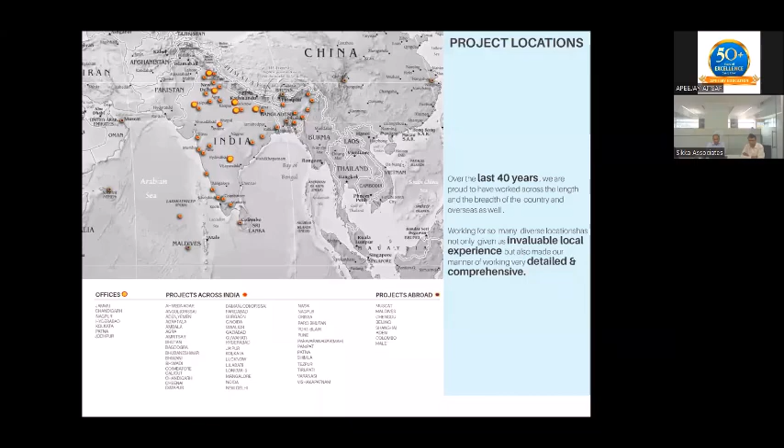Two things about our design. We always try to design in a very practical manner, so that our designs are used for decades and decades by people very easily, very practically. They are easy to maintain buildings which people come into every day and are able to use in a very efficient, very pleasant environment. Buildings are not just meant to be finished and inaugurated, but over years and years of people's lives working in them, they must satisfy functional requirements, maintenance requirements, how the buildings sustain over time, and how the functions they are meant for may change while still allowing those changes.

Those are important aspects. At the same time, something innovative, something fresh, something unique about every project is also possible. So it's always a blend of a very practical, pragmatic, down-to-earth approach, but something innovative also, and at the same time relevant to the time and place that we make it. So these are the four most important aspects.

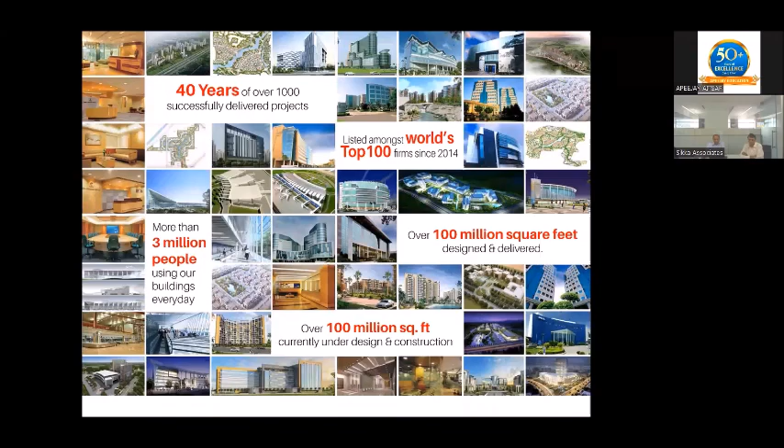We have been listed amongst the world's top 100 in the last 7 to 8 years, a rating by a British journal. We've also been fortunate to win a few awards over the years. So just a glimpse of the breadth of the projects, the range of all kinds of works across the architectural and construction industry. A lot of institutional work, a lot of offices, transportation work - possibly these three are amongst the biggest sectors we have been working on.

Now I'll go on to IIM Jammu first, and discuss this project more in detail, so we can see how one project has evolved in terms of various thoughts and stages of the thought process. Then I'll show a few more interesting slides on other projects we are currently working on or recently completed.

So the IIM Jammu site, I believe you would have largely seen or understood. It's a site out of Jammu, between Katra and Jammu, along the NH44, which forms the frontage of the site. The site goes deep away from the highway between two catchment nalas, which are drainage catchment nalas, and basically the ridge of the hills is what has been given to IIM.

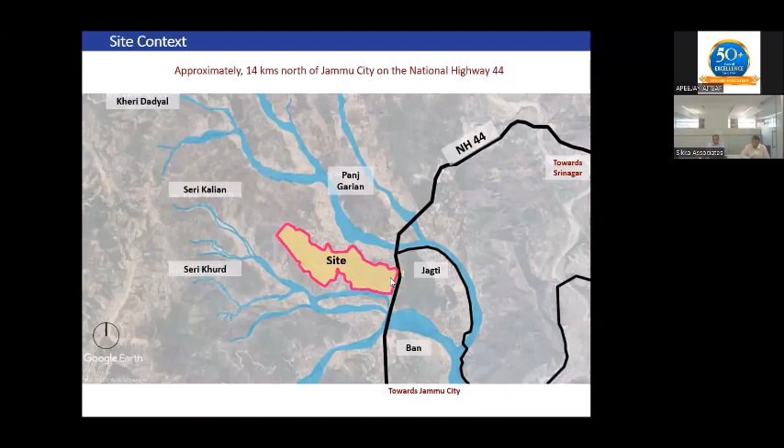The site is about 200 acres, roughly almost 2 kilometers in length, a very linear site.

Now, while earlier IIMs were all largely urban campuses—Ahmedabad, Bangalore, Calcutta, Lucknow—they're all very urban campuses. The kind of picture that emerged from these campuses has regular topography; in terms of land profile, they're pretty straightforward. Therefore, the buildings have taken the attention, evolving various forms and permutations of spaces for the functional requirements of students and the campus. So these are all campuses that are very urban, with straightforward topography.

In our case, when we began the project, there was a design competition. I'll show you the thoughts at the design competition stage first—what was our first reaction to the site and the brief. We wanted to come up with a site that's not just an IIM like many others in urban situations, but an IIM that is very unique to the topography and the site at this location. That was the initial thought direction, and I'll explain how and why it changes and evolves.

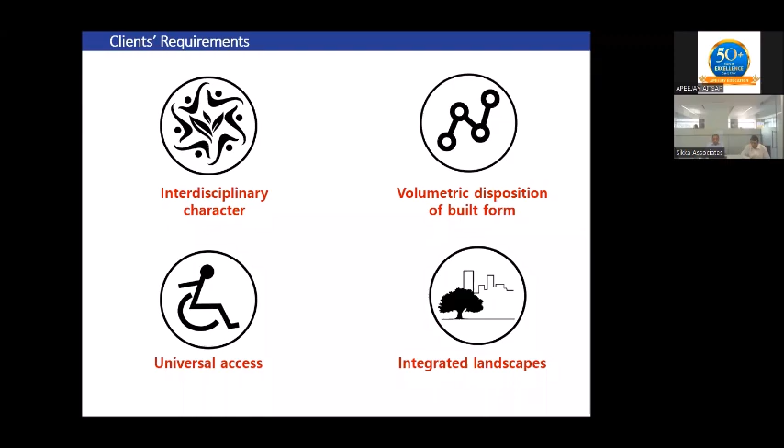Now, campuses, while we may look at them from an architecture point of view, we also have to be aware that campuses are used very rigorously by students, right from morning till evening, sometimes even 24 hours. So they have to be very practical, student-centric learning spaces which are easy to use, easy to live in, and easy to connect between various parts. While they have to be interesting designs, they also have to be safe, convenient, sheltering, and practical.

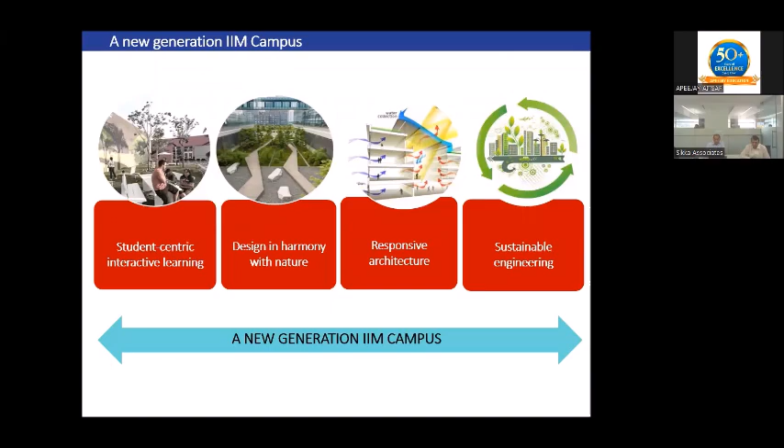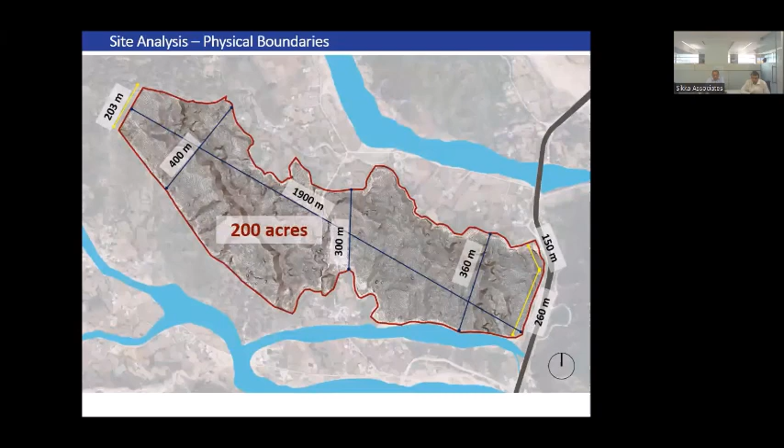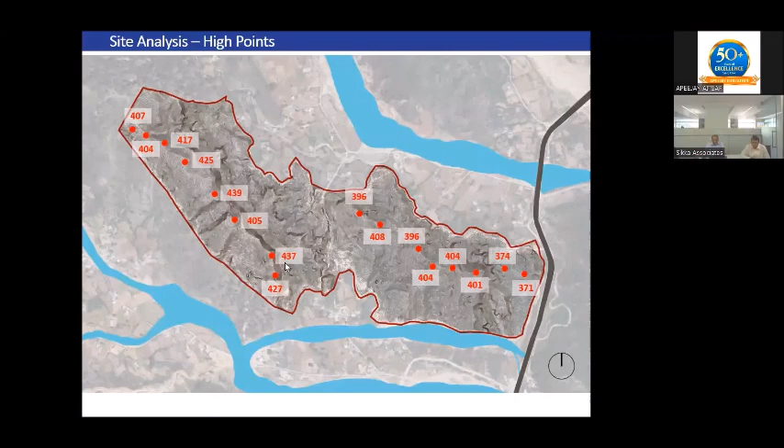Now, these were a few ridges—what you see here are the spot levels of the ridges. Essentially the site is divided into two ridges: one goes right from the highway deeper inside till about the middle of the site, then there's a low-lying valley cutting right through, and then the second ridge goes diagonally across the balance half of the site. This was the site condition, and we had to work to complete phase 1, leaving provision for future phases, at least one more, if not more.

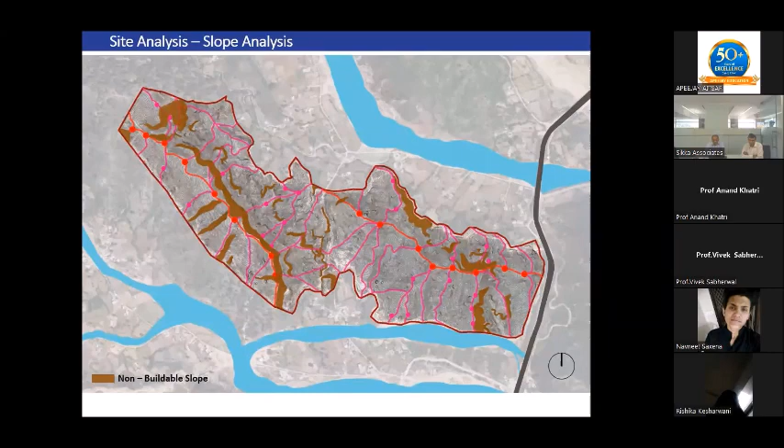This shows the ridge points, the slopes downwards, and also some of the catchment areas—the natural edges of the site. It's not that water is already retained there, because without a boundary the water just flows downwards to the rainwater channels. But these are the fringes of the site where natural drainage is possible to be created, and if we were to create a larger retaining structure, these could become catchment areas, allowing larger natural water bodies.

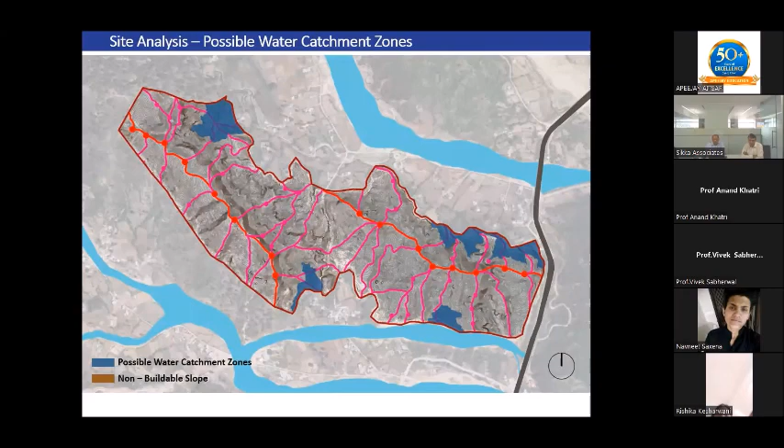Now, if you see, hill 1 has a sharper slope to the north and a shallower slope to the south, and hill 2 is the reverse: a shallower slope to north and sharper slope to south.

So phase 1, logically, since the entrance is from the highway, was meant to come up on hill 1. And it's logical that we largely use the south facing slopes, so there's more sunlight and more area available for the development of the campus.

So 3-4 important things: preserve maximum trees on site, preserve the gradient as much as possible, and maintain a gradual slope of about 1:20, which is walkable, so that in daily commutes between buildings it's not difficult for students to do that several times a day, like from hostel to dining and back to hostel, or to academic blocks, or to sports, with several commutes during a typical day routine.

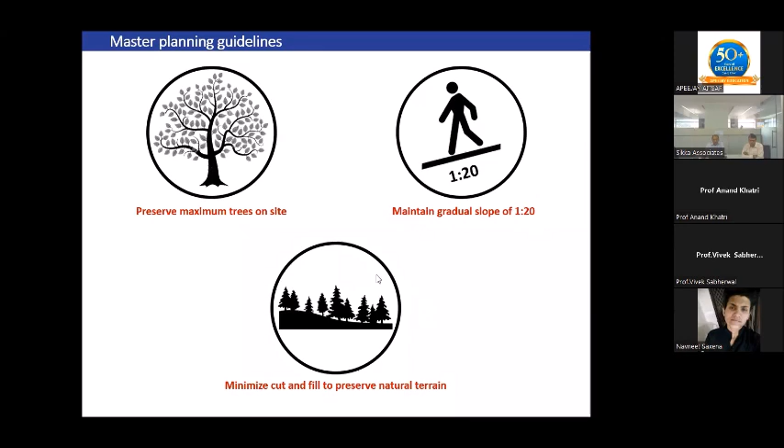And third was, of course, to create minimum cut and fill and use the contour if possible.

Now, option 1 is if we create buildings only on the ridge. While it may be easy to construct, the negative is that the road network would be quite long, and the buildings will change the topography of the site, becoming visible as protruding from the top of the hill.

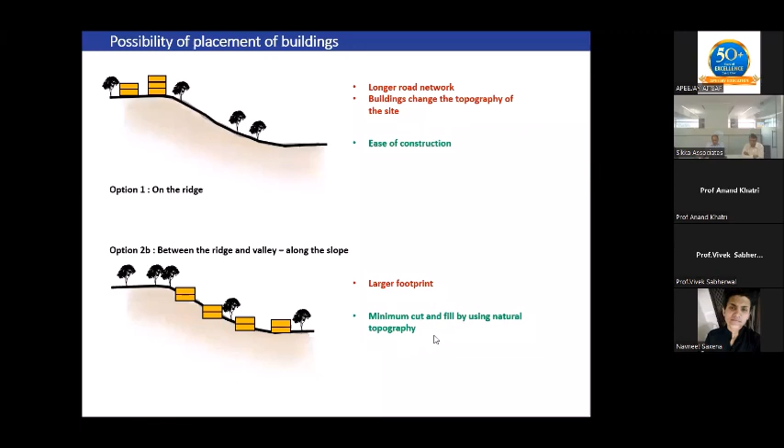If we build on the slope only, leaving the top free, we get a larger footprint spread across, but the benefit is that we possibly have lesser cut and fill.

So the ideal situation is that you build neither on the top of the ridge nor in the valley, and use the mid slopes. That is by and large the right strategy, to use the slope in a way that we still allow drainage to the lower levels, do not clog the lower levels, and use the buildings to maneuver between the cut and fill required on the slopes.

Find the lesser slopes, build the buildings there, and maintain the essence of the site, which is sloping. The ridge, being very precious with very little footprint, can also be used for landscape, or for only a few selective buildings if required. So that is the ideal situation.

So with that thought, in the design concept stage we placed the buildings like this. We had the main academic campus facing south, smaller blocks to the left going on to the student hostels, and then the sports areas at the valley area.

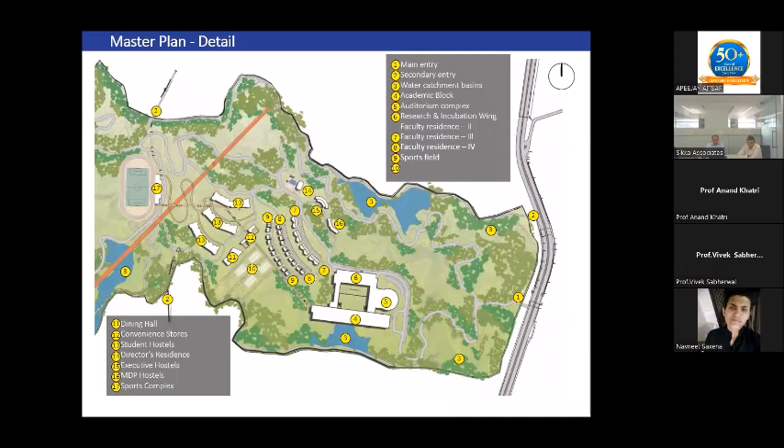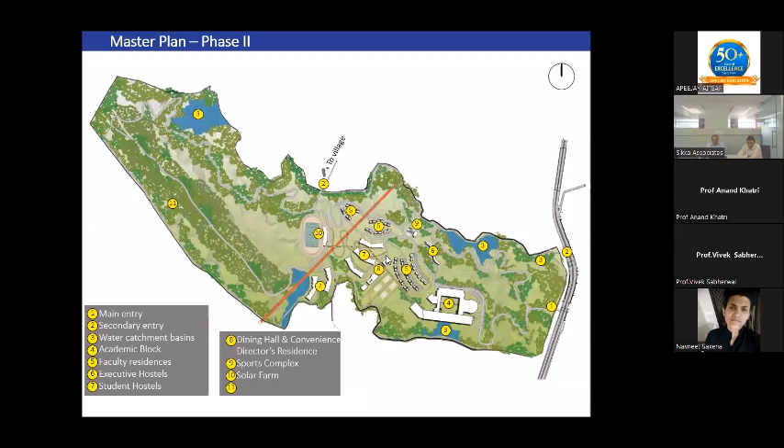So that's the kind of layout we proposed at that time, using the north slope only for very selective purposes, maybe some senior faculty and the director's residence and so on. Everything else was facing south.

So the important thing was that we left the entire edge of the site able to retain water at the lower levels, and built at the mid slopes. We took service connections across the mid slope as well.

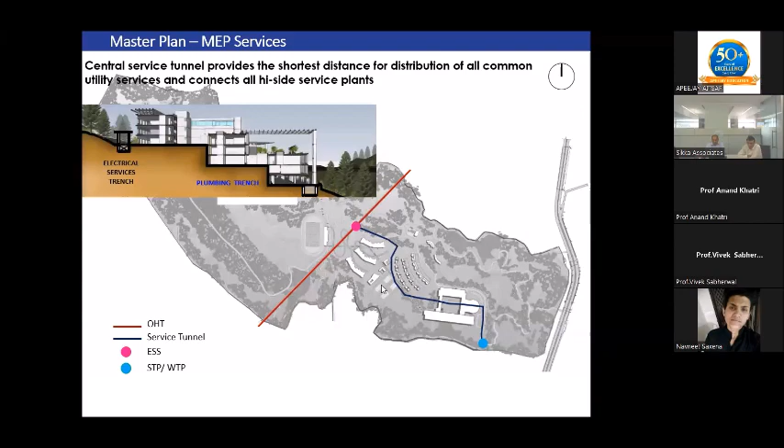The academic block was placed in a manner that, having created a natural catchment area by putting a retaining wall on the extreme southern edge, we allowed the water to come in and create a natural water body at certain times of the year.

Even if the water is not there in peak summers, which it won't be, still the element of the slope, the element of the landscape, the element of green space itself is also a wonderful thing.

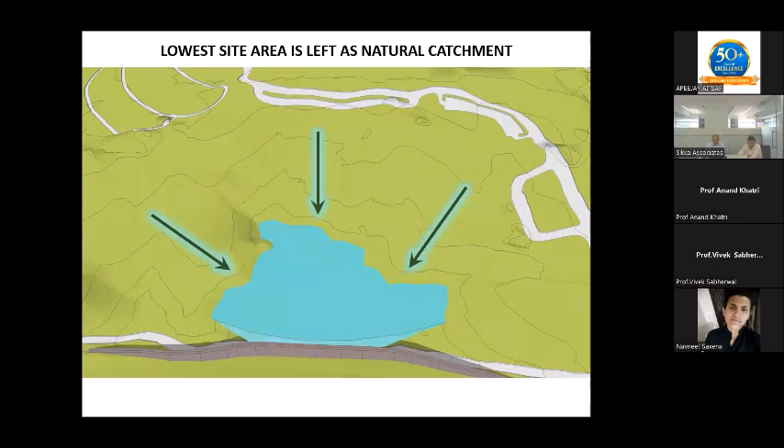And water would have filled up at certain times depending on the rain and the amount of harvesting or catchment we can do. So the extent of water was not regulated, only the southern edge of the water was regulated.

So it was more like a step well kind of situation, where we thought we would contour the land into a series of steps and allow the water to be retained at as many levels as possible.

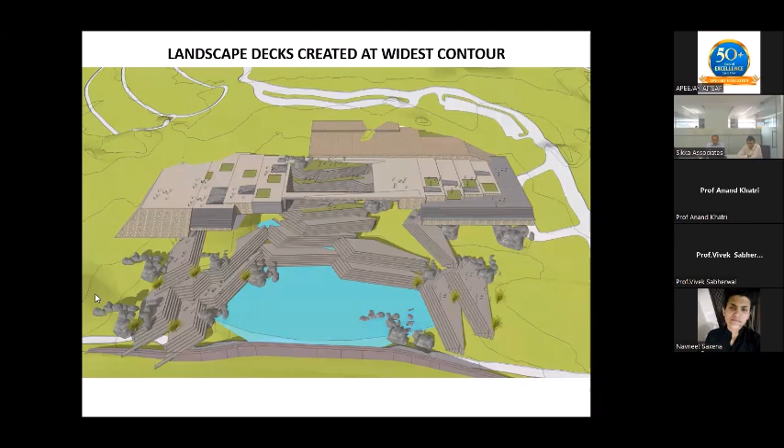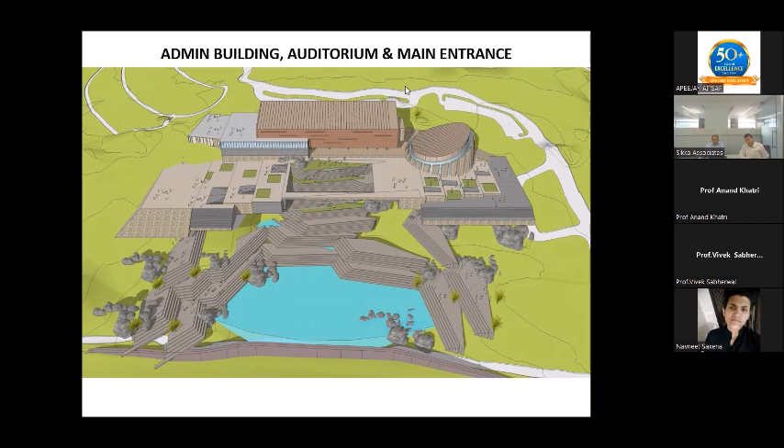At the mid level, we created a few landscape decks overlooking this entire open space with the larger steps and the water body. On that deck, we had the larger buildings approachable from the upper side, from the top of the ridge where the main approach road was placed. The road approached the auditorium building, admin building, and the main entrance to the plaza.

Then on the two sides we placed the connecting link blocks, and the student zones with the library and cafe were at the lowest level. On top of it we placed the main academic block, overlooking the entire valley and the landscape.

So that is the kind of structure that we had designed and planned, that we would have minimal construction on the northern edge, and we would largely have a linear building placed above the slope so that we have minimum cut and fill. We allow the water to flow right through the building below it, and the building is kind of an independent, floating, independently placed building with a largely contemporary form, but maybe with a few slopes depending on the profile for the terrace that we choose and the solar panel angles and so on.

And a building which enjoys the view, the openness, the large greenery that is all around us, and the south facing facade, so that we have plenty of natural light going right deep into the building.

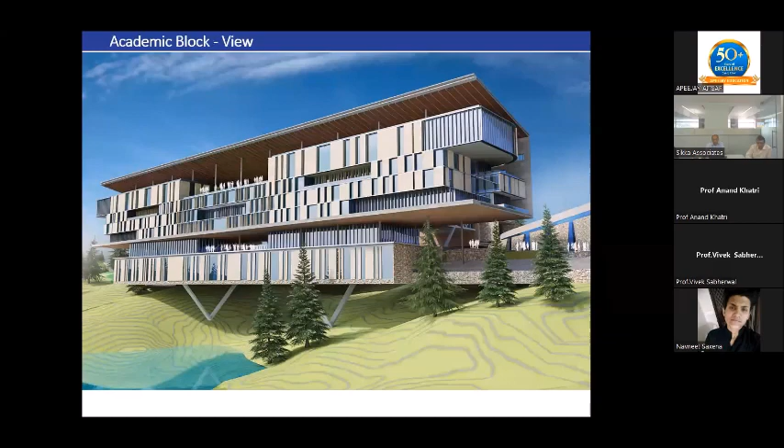From the water body level, that's the view that we would have got. So the lowest block that you see, that is the cafeteria, student center. Then we have the deck level, which has a few other amenities. And then we have 4 or 5 levels of academic buildings.

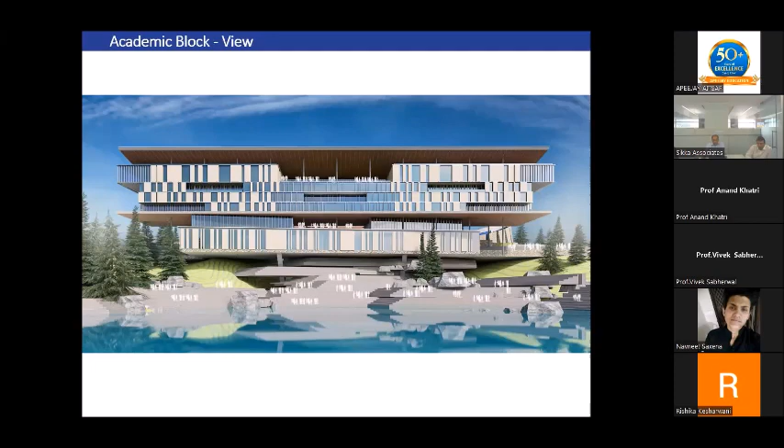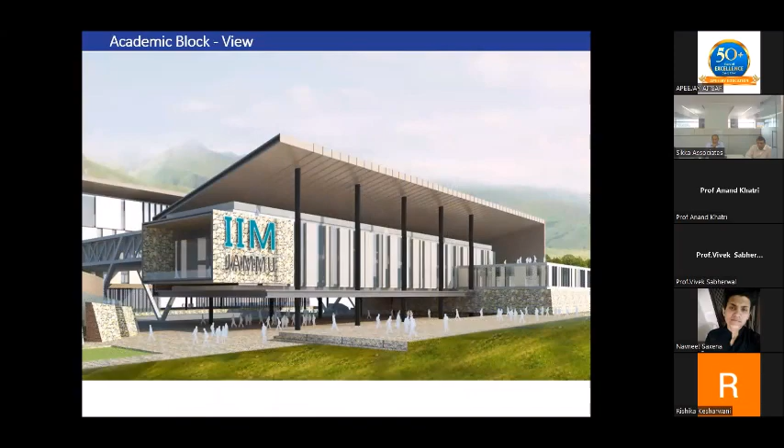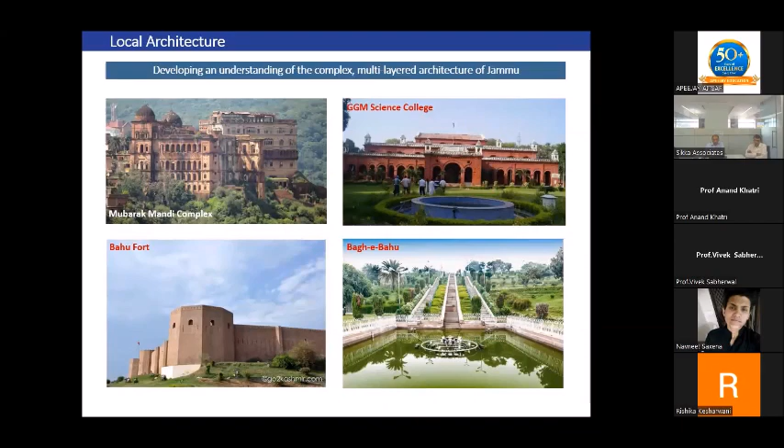Then these were a few studies on what kind of relevance local existing landmark buildings could have. So Jammu does not really have a distinct architecture style of its own, while Kashmir, of course, has, but not particularly Jammu.

We thought that if you look at the campuses, one of the most important elements is that if you want to make a design statement, a singular statement material or color helps in making a very controlled statement in terms of design, bringing a focus to what you want to change. Otherwise, everything else is by and large the same. So there's one canvas, only pick up what you want to highlight.

We looked at the choice of materials, whether it could be brick, whether it could be stones, whether it could be more modern finishes. And then our recommendation was that, because we wanted to retain the character of the site, retain the greenery of the site, and not make too much site construction, we in fact recommended a building which is very modern, largely using steel, glass, materials which are prefabricated off-site, brought to site and assembled.

And that is the look which we thought would have been a very progressive, modern look for an IIM created in today's date. An identity which is largely blending with the nature, blending with the greenery around it, and not hindering the views, not bringing too much heaviness into the site. A building which is very light compared to any stone-clad or brick-clad kind of structure.

That's the cross-section through the academic area. And these are the three main plazas.

So we had one auditorium plaza, which is more of a ceremonial area. We had a central plaza. The central plaza could be a little more formal, but still a place which is a hub, used for crisscrossing, used for gathering, used for small interactions. And then a larger, more informal student plaza to the left side, which is facing the student entrance and the hostels. So that every day, as they're coming in and going back, there are spaces between the trees, spaces between the contours to stop by, meet, and spend some extra time there.

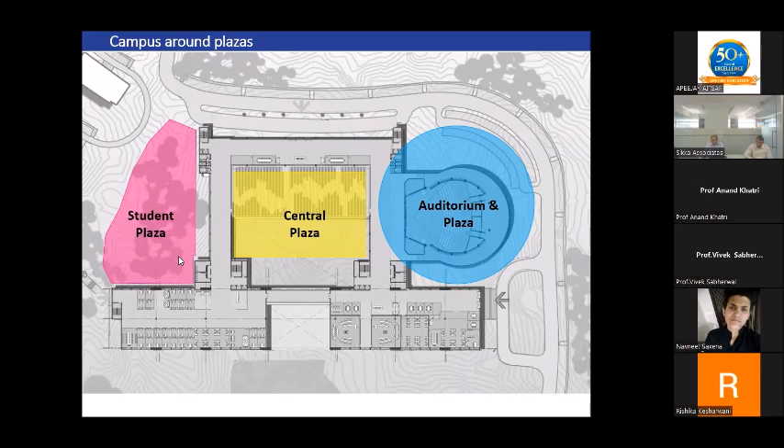So three distinct plazas, each having its own environment and a certain functional hierarchy, or I can call it use hierarchy, in terms of the informal versus formal.

And while the local stone was used heavily at the lower levels, in terms of landscape, in terms of the podium, in terms of the lower level of the building itself, and maybe some cladding of the low-rise structures, the structure above that was largely a more modern structure.

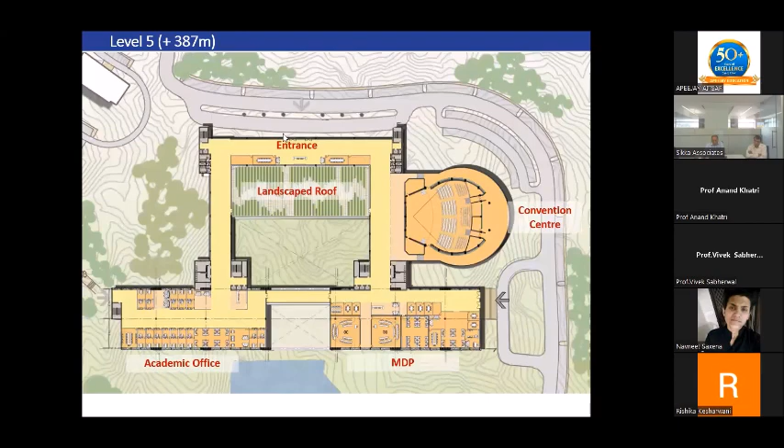So these were the levels. We had level 5, which was the entrance level. We had a little bit of a concourse connecting across both sides to the various academic offices, convention center. Then we have the more independent program offices, incubation center, and research labs to the roadside, so that they are more visitor-oriented spaces, and the student, admin and faculty are all towards the south side, which is the complete student-centered block.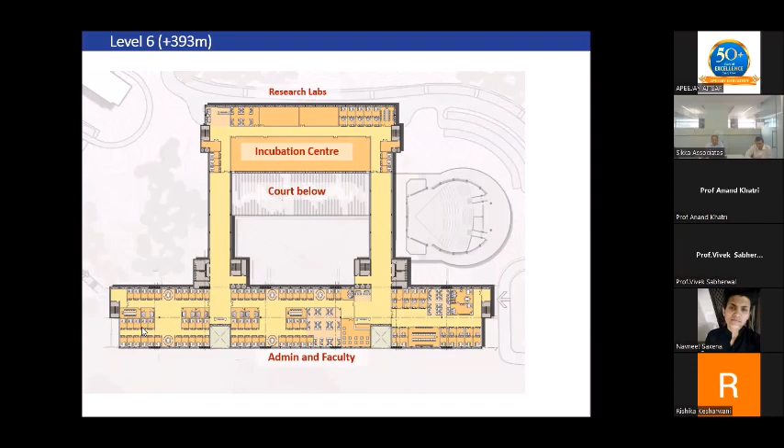We had a couple of roof gardens in between. Library was at the upper level. So these are the kind of classrooms, they had a range of 45, 90, and finally even 60 has come in. And the classrooms were typically horseshoe-shaped arrangements, so that there's a lot of interaction between the students.

So the lower levels were the classrooms, and as we go higher, it becomes more of academic and faculty spaces. This was a brief study on the various kinds of classroom arrangements.

On the left are the linear ones, which is more of a school-like environment. As classrooms get bigger, we want students closer not just to the board but also to the teacher. In an IIM, it's a highly interactive environment, so you want students closer to each other too. Closer doesn't mean just physically, it also means visually. A horseshoe-shaped classroom brings everybody as close as possible, not only to the board and the teacher, but also gives more interactive vision contact with each other.

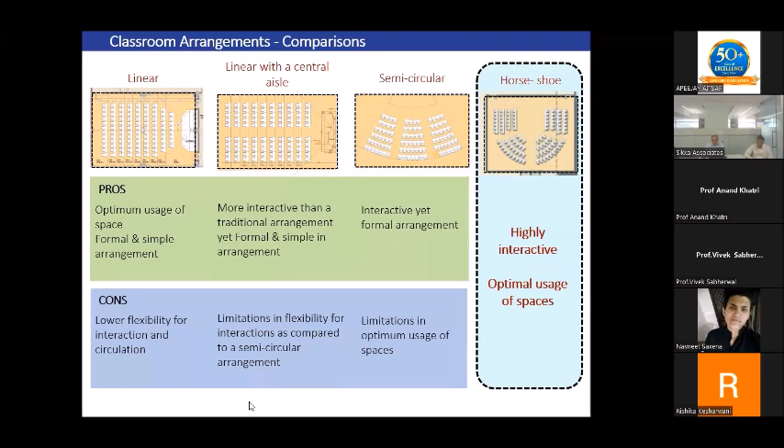So various configurations, various kinds of arrangements for the various sizes of classrooms.

Then the hostel block was also about stilt plus four. Now Jammu has a little bit of a harsh climate, with a pretty strong summer and colder winters than Delhi. So we placed the hostel blocks along the contour in a way that the stilt level becomes a covered walkway. As the campus spreads, the ground floor or stilt level of the blocks actually becomes a common public walkway itself, so we don't need an independent structure. This becomes a public or common space at the lower level, and as we keep adding buildings, they'll all continue to extend the walkway.

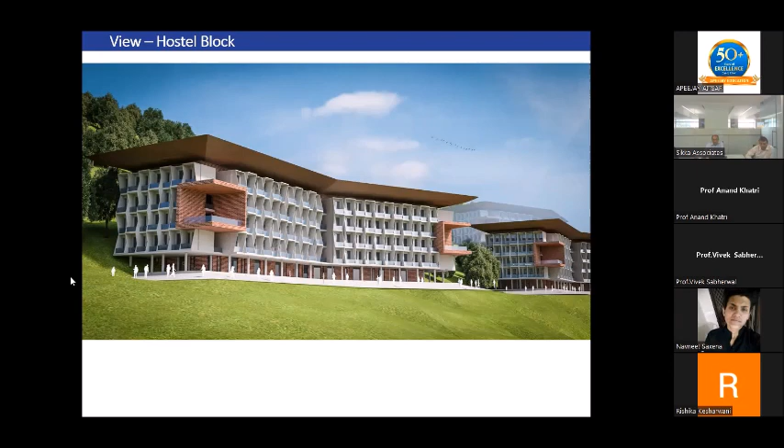Along this lowest level, the ground floor, you have a few living rooms, a common room, a couple of amenity shops, some student lounges, and service areas. This also allowed us to not excavate beyond a point at the lowest level, which was the foundation or ground level.

As we go higher, the block expands a little, and the upper side was also built. But still, if you see the design, the valley side is where the rooms all face, and the left and right are also open. The hill side upper wall only has minimum ventilation, for toilets, services and circulation space, and they all have a central core.

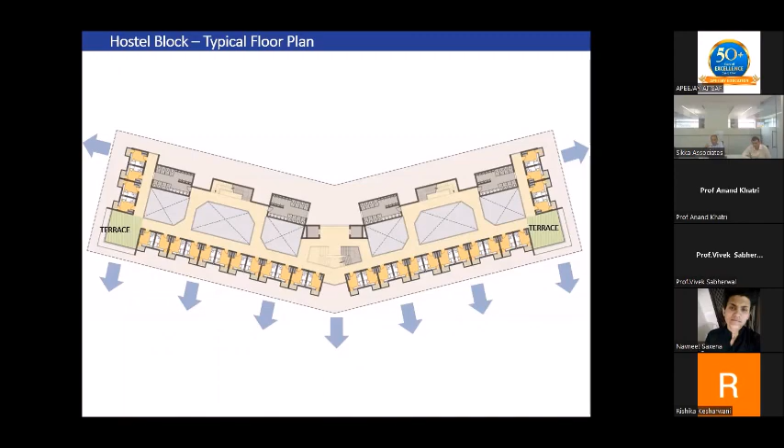By doing this, we could place the blocks very close to the slope in between the levels, so the rooms all enjoy good views and good sunlight, without projecting too much over the hill. This allowed the blocks not to be very high, because the hill itself is more than 60 meters of slope, while the block is only 15 meters. So with 15-meter high blocks, we can place a few of these in between the slopes.

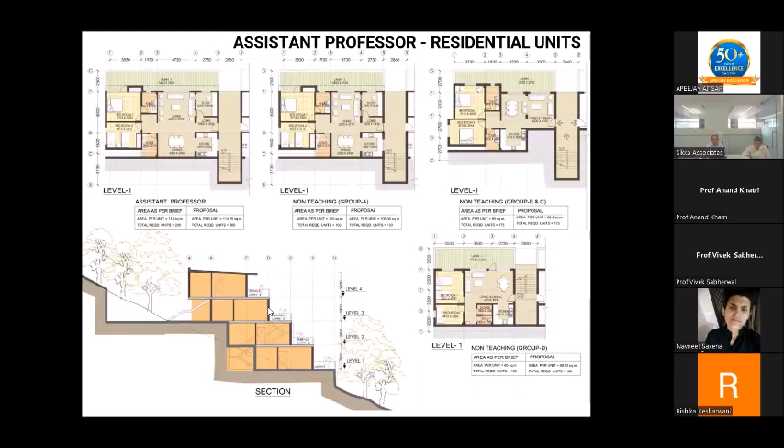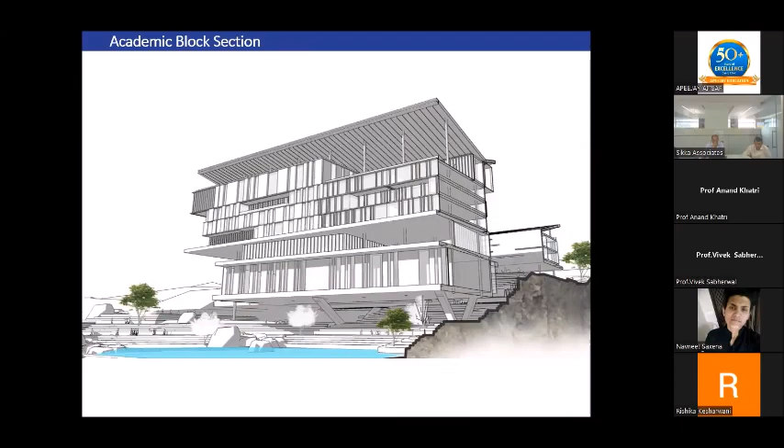That was the idea. Similarly, faculty residences were staggered along levels so that we use the slope, coming in at the upper level and stepping down or up as required. Those were the thoughts, using the slopes as a mix of stone, pavements, and green. That was the design we presented, and that's what we proposed at the competition stage.

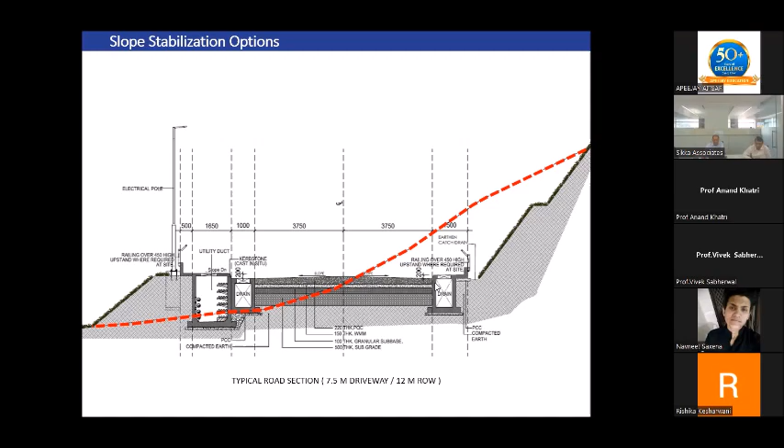A few more things about building in hills. We would ideally like something like this: the red shows the possible natural slope of the hill, and in between that slope, if you can find spaces so that the cut and the fill is self-adjusting. Find sections, find places where we can build with a minimum footprint, so that the cutting and filling gives a balanced slope, and the slope upwards and downwards is self-retaining. It's not always possible, but that's ideal if we can do it.

Retaining the slopes is extremely important, because these hills are not just hard rocks, they're actually riverbed rocks. The Jammu area hills were possibly, at some point of geological age, at river level, and as these hills have risen, the circular rocks and pebbles have essentially formed the hills, and they're not very stable. So one needs to be very careful about the additional hill we leave behind, and how stable we can make it using gabion walls or other techniques.

And then local flora and fauna to further strengthen the slopes and so on. Those were just a few others. I'll skip through this for the time being.

These slides are more about materials and other details of how the facade would have been. Not just a lot of glass facing the south side, but possibly a double skin, which has a protective outer facade and a central space to clean it, to ventilate through, so that it is self-ventilating. If there is too much heat in the summers, the facade itself self-ventilates out. And other times, basically, the sunlight is allowed to come in, the views are not obstructed.

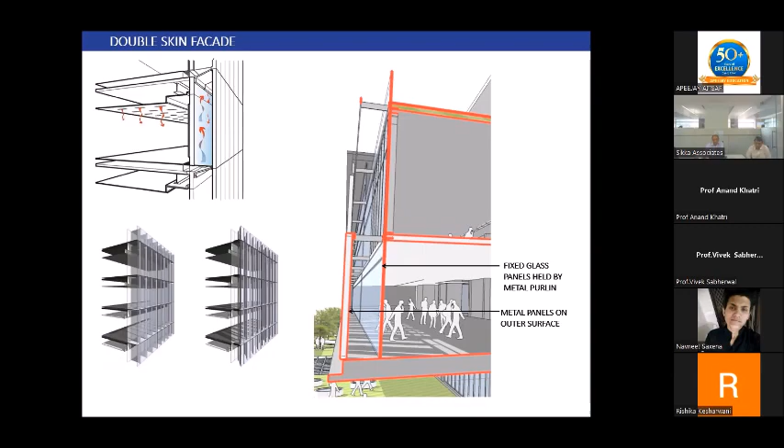The roof would have been a mix of solar and opaque, using cavity walls right through. So those were some of the principles we were able to apply, and despite being a very modern glass and steel building, we were still aiming for GRIHA 5.

In terms of construction material, instead of using traditional RCC construction on site, which is heavily labor intensive and material intensive with a lot of movement required, had we constructed in steel, it would have been minimal footprint, minimal site construction. That was the idea behind it.

We also recommended using prefab elements, for example, like hostel windows. They could have had a completely prefab, complete encasement, and the whole section is brought and fixed as the block work is being done, so that the window is already there, it's already self-aligned, self-positioned. We're building the window with the wall.

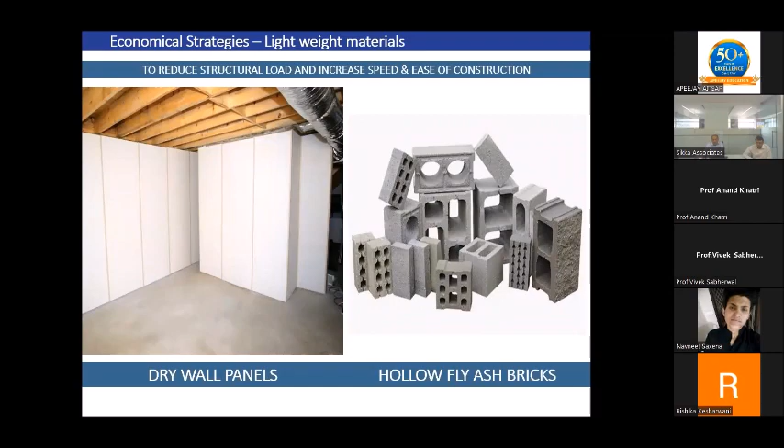And the facade, if required to be a permanent finish, could also be a mix of ceramic or terracotta ventilated panels. Internal partitions were recommended to again be lightweight, because institutions change, their use, forces evolve, new spaces are required. So we always recommended drywall panels so that they can be easily changed, replaced, or repositioned. A few finishes on the inside.

So those were just the initial thoughts, and I still believe, which is why we're showing this to you, that all of these are still very much viable, very much possible, and very pragmatic thoughts for this particular site.

But what we finally went on to build and what we are now constructing is this. So it is interesting how the architectural process changes so many times when we start interacting with the client. And the reason is many - we are first of all not building for ourselves.

It is a building which has many stakeholders. It has the IIM board. It has the user himself in terms of a more defined set of individuals. And as we start interacting, a lot of different other thoughts, aspirations, different aspects of their experiences of functioning come in.

And when we presented our design, they liked it. As we went further, a lot of different thoughts were discussed, and a lot of aspects of it were retained. So while this may look like a very different building, actually a lot of the features, a lot of the different issues I spoke of have all been retained here. Only the architectural finishing, the character and the style is different.

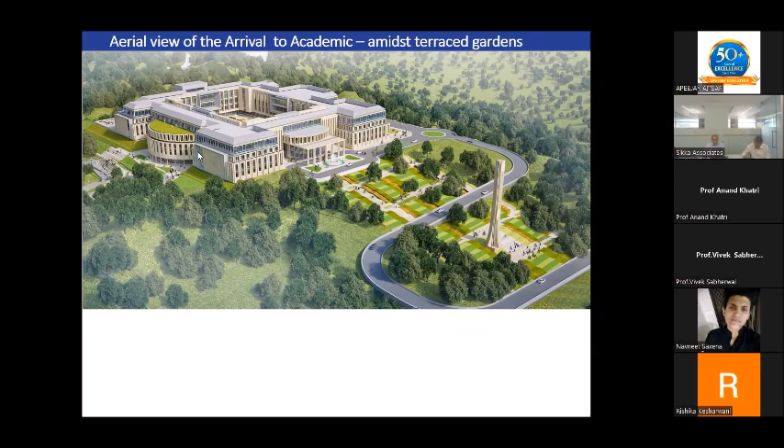At the entrance, this is the view when we created a marker, because the building is quite deep inside from the road. So we thought a taller element is required to pick up the campus presence from a longer distance on the highway.

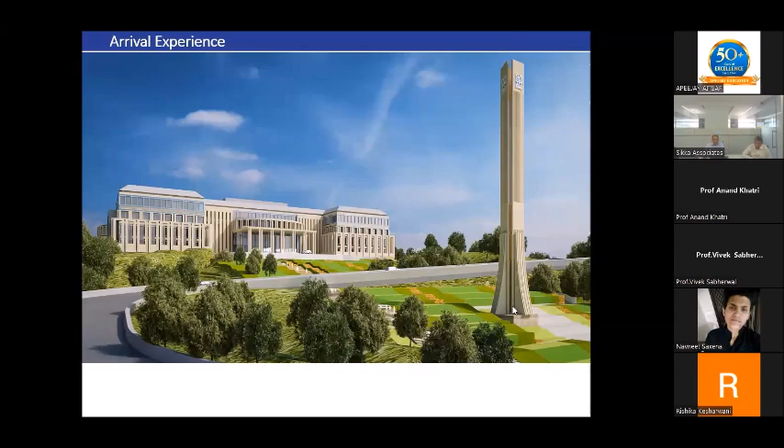Now if you look at the detail of the plans and functions, we have 4 blocks, 4 levels between the academic spaces. The lowest level is only half a level, overlooking the amphitheater and the water body on the south side. Above that, we have the main auditorium and the library, which are both double height and have faculty offices to one side and academic spaces to the other side.

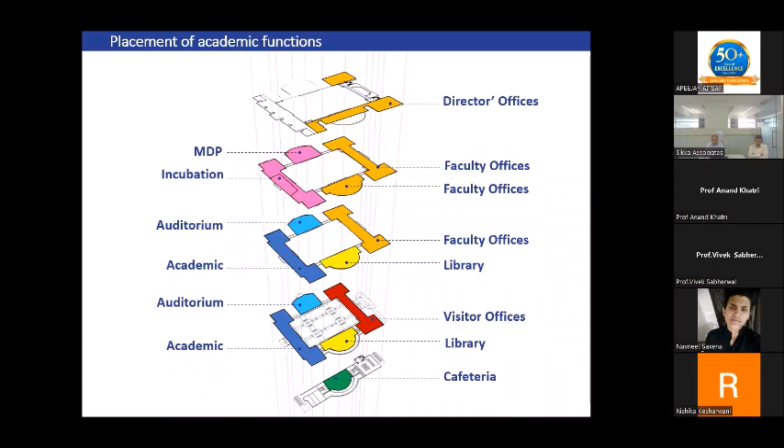If you look at some of the other IIMs, they have independent blocks - an independent auditorium block, library block, MDP block, classroom block, and so on. In this campus, there was a need to preserve and be compact on the footprint. We wanted to agree with that in some ways, but we still managed to keep it all like one building. There are functionally 4 blocks placed around one quadrangle, but connected in a far more compact manner. None of these spaces have cores within them - the cores are in the white spaces in between the 4 blocks. So the circulation cores and service cores are all common across blocks, which saves a lot of footprint, area, and service network.

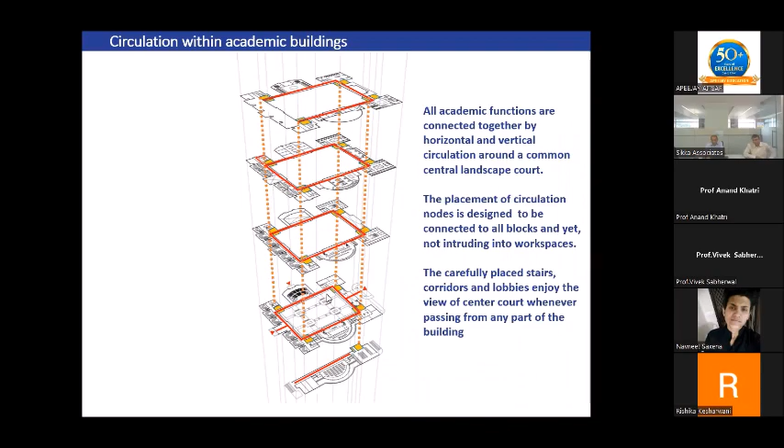So this is how it is - we have the admin block to the right side, the auditorium block above, the academic block to the left, and the library block to the bottom on the south. The center court is a very formal quadrangle but with interactive spaces - as one crisscrosses it, there are spaces to hang out. The student spaces then come to the left or to the bottom, which is the library side.

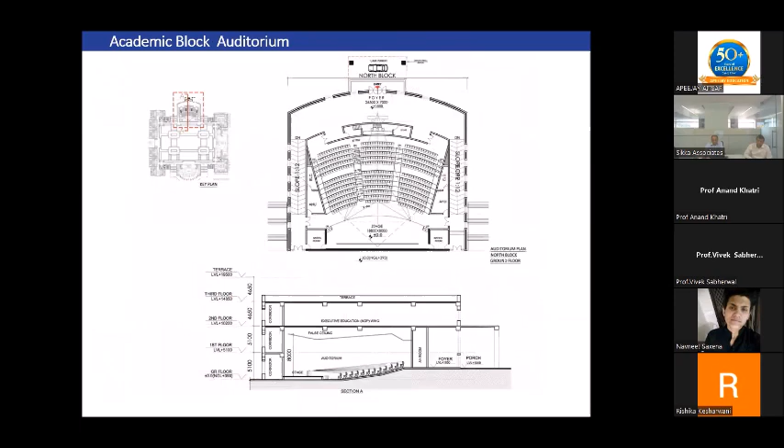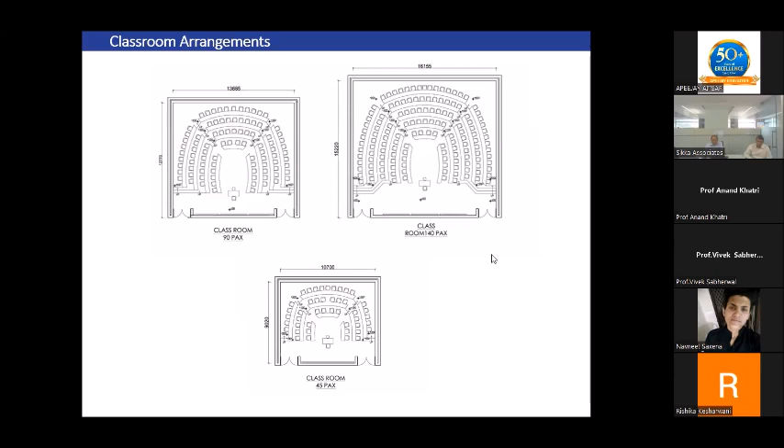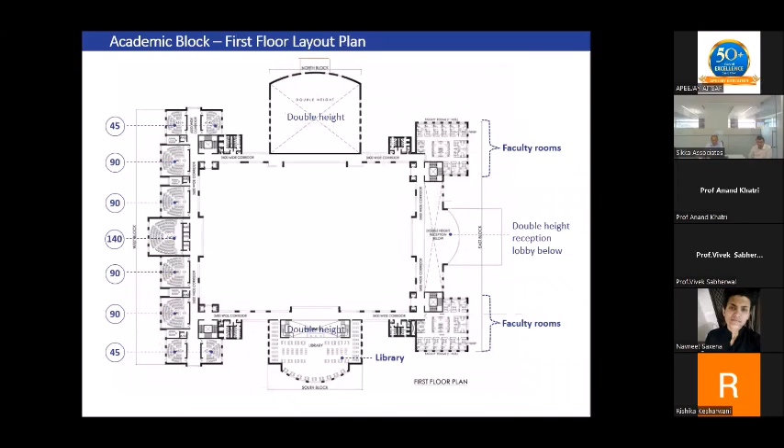A few details of offices within them - we'll be happy to share these, so if any of you would like a closer look, you can certainly do that. A lot of the aspects remain the same, like the horseshoe-shaped classrooms depending on size and capacity - we have 45 and 90 largely, and 140 also, with 1 or 2 of the 140. There are details of the washrooms and details of how the faculty rooms are quite compact but still connected to the classrooms on all levels. So everybody has their own independent functional spaces, but all of them are connected vertically and horizontally together.

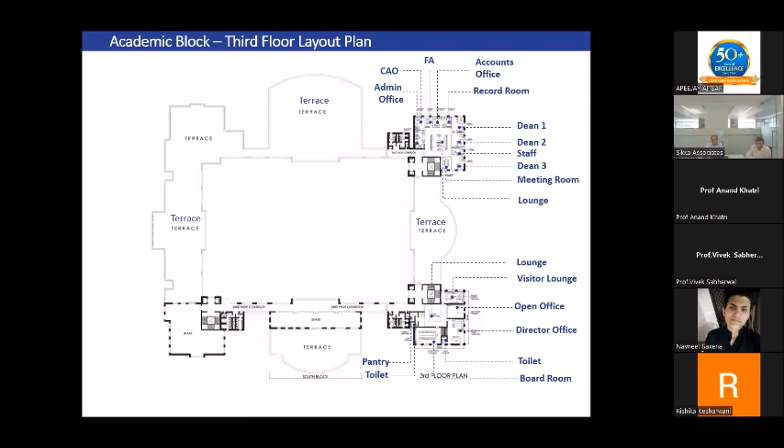The MDP block is to the north over the auditorium, and the senior most faculty, deans, and the director's offices are on the top floor of the admin block. At this stage, we had only limited area available to us, that's why we constructed only this much footprint. But finally the institute allowed us more area, and what we're now constructing is actually the entire 3rd floor.

So these were various spaces, but what is most important in the institute is not just how the spaces function in the indoors, in the rooms - within the rooms, all the spaces I'm sure will function in almost every institute.

Within academic offices, classrooms, library, and auditorium, everything does function. But what really makes an institute remarkable is how it functions outside these spaces together. How an additional feeling is created for a campus, for an academic space, in between these spaces, so that moment students have a little extra time before or after classes, they still have an enjoyable and purposeful experience. There are spaces where they can sit comfortably in various kinds of weather and environment, in various sizes of teams or groups.

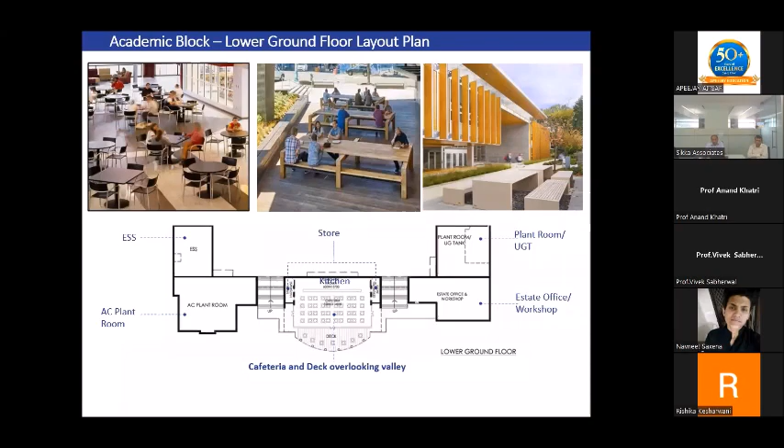If somebody wants to study independently, he should not have to go back to the hostel. He should still be able to find a nook in a corner for sitting by himself. If a group of 5 or 6 want to meet, they should also be able to find some space easily—not necessarily indoor, but also some sheltered or completely outdoor space. Apart from just studying, students need a little sense of change and free time away from classrooms, while still getting on with purposeful discussions. Which is why all these spaces, over and above the RFP requirements, are extremely important, and have to be close to the main academic block. It is not enough to just design the classrooms or indoor spaces, but how these outdoor spaces connect to the indoor spaces and together form the experience—that is extremely important.

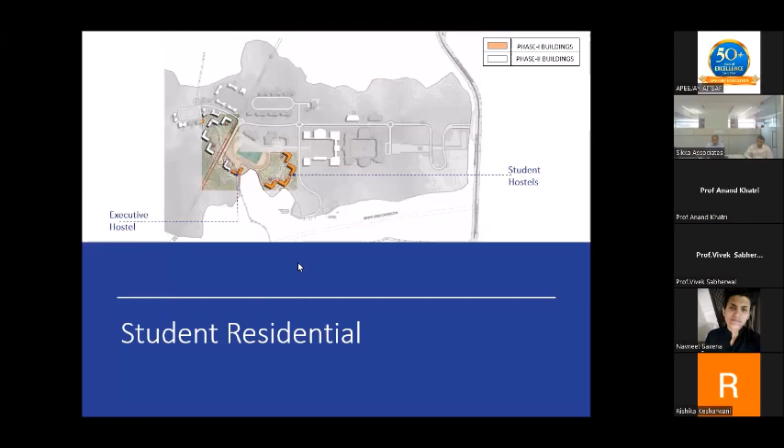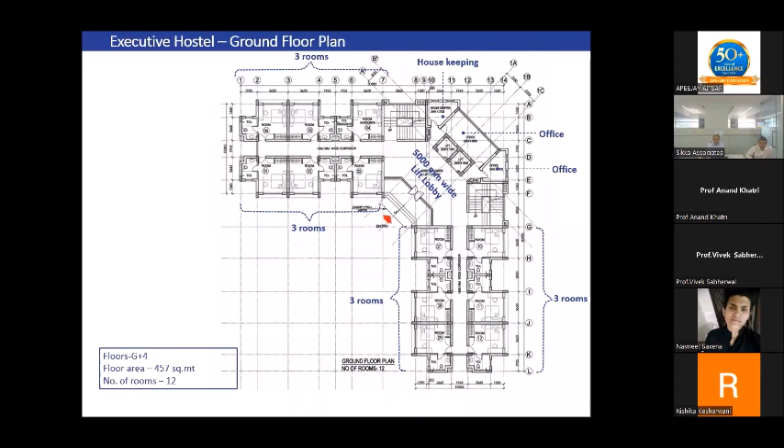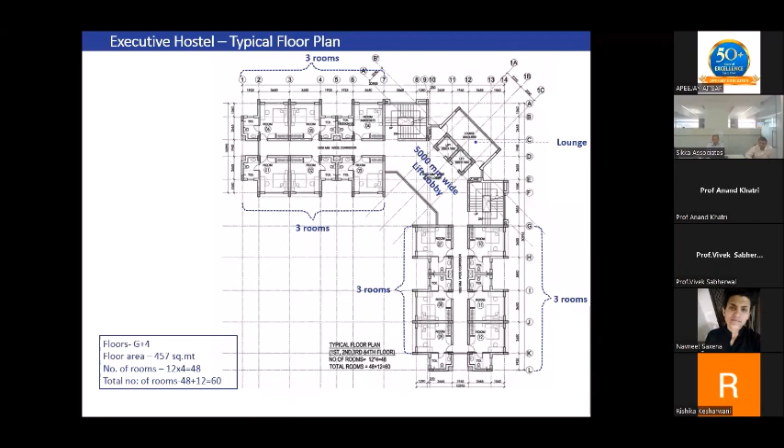Student residential was a group of 4 hostel blocks, which we kept in an L form, so there isn't a typical long corridor feeling. We have very short corridors on both sides of a central lobby, with the toilets tucked behind, and hardly about 5 or 6 rooms in each leg of the corridor. These hostels were placed in an L together as a set of 4, so this comes out as a very interesting configuration of 4 blocks, none of which are very heavy, long, or overpowering. These were executive hostels with attached toilets for senior students, PhD students, etc.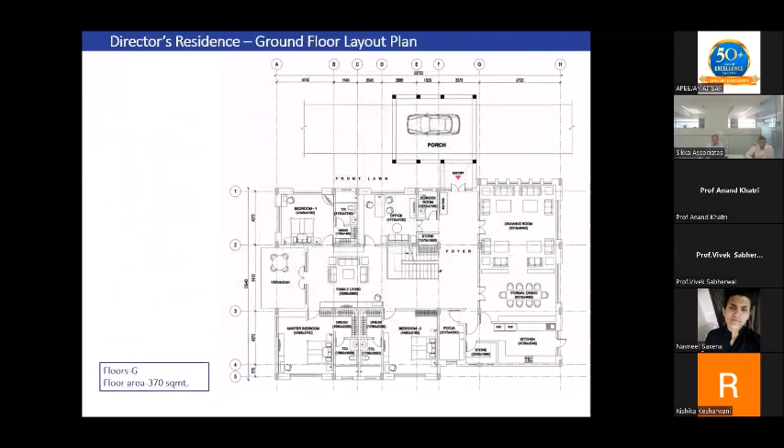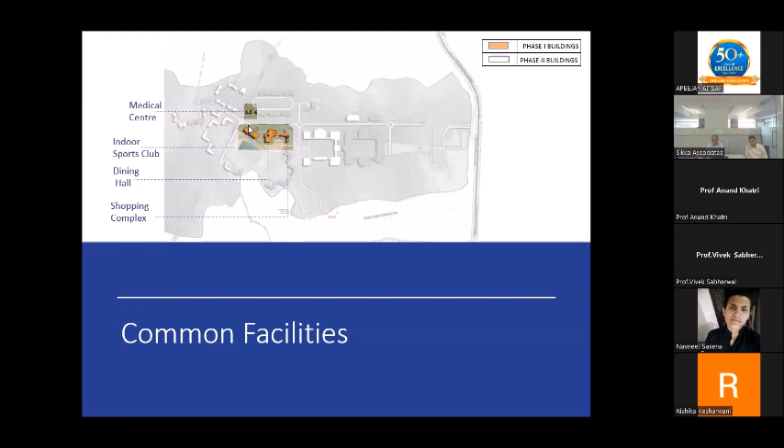Faculty and staff residential are in other parts of the campus, which were a little further away, sometimes using the northern slope—so we did not completely ignore that slope. The road remains on the ridge, and the larger buildings are to the south, but the smaller buildings were placed on the northern facing slope also. So the campus actually begins from the entrance of the highway, goes right up to the top of the ridge through the shortest distance, and then comes down towards the center into the valley.

In the central space, we have the sports, dining, and other amenities. The dining hall is divided into 2 sections, because you don't always need the entire hall used as a single space. So it's very easy to close one section, do some housekeeping in it, and still have part of it functioning.

So those are a few glimpses of the current construction going on at IIM, and a few more projects we'd like to briefly share. We're also doing Central University Jammu, which is a far bigger campus. In terms of the quantum of buildings constructed, not many have been built as yet, very few, but it's a very interesting way of planning and construction.

This was a campus with a profile of about 600 acres, 3 times the size of IIM. It is spread across 3 or 4 hills, and the approach from the highway is only from one road. This highway comes in at this point to the Arrival Plaza and starts its journey across various hills and valleys, but we wanted to cut short and give a very direct, clean connection across these 3 or 4 hills, one of which is on the other side of the highway.

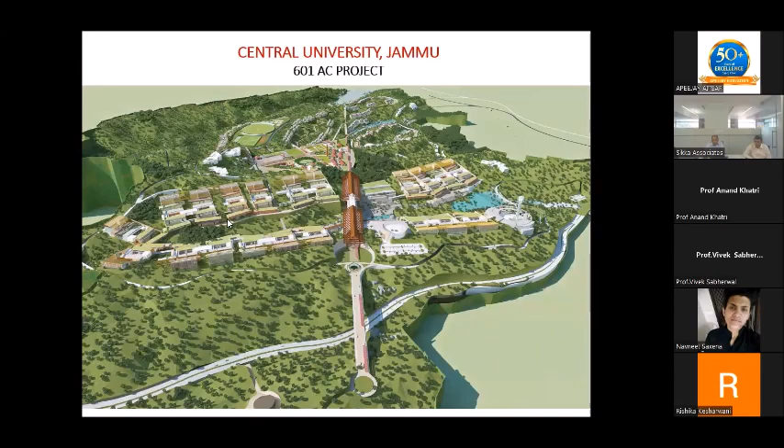Now, in a large campus like this, again on a very difficult terrain, how do we create multiple buildings which have similar functions, but the footprint or topography of every building is different? If you see carefully, these blocks actually have a similar amount of mass, but each block is a set of 3 or 4 modules. Each of these modules is similar, so between one block and the next, they're all similar modules, but the arrangement or permutation of these modules changes depending on the contour. So depending on the view, the contour, the exact slope, the alignment of these modules changes. A complete set of 4 modules together makes up one department, one science or one typical teaching department.

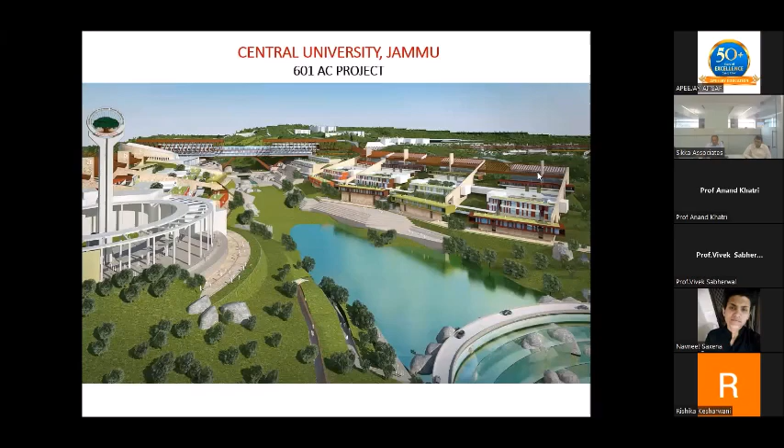That's how each of these schools or departments function. All are overlooking a valley, all have an approach from the upper side or mid-level, stepping down. The valley uses rainwater harvested in it to create more green space or sometimes a full water space. And if you see the angles of these modules, they all depend on the respective contours and alignments.

In this campus, what we did first was make the road network, the bridges, the culverts, the catchment areas, and the retaining walls, because we wanted to capture the site in a way that it's stable—so it wouldn't fall, change, slope down, or slide further over the years. This was to stabilize the entire site as the work was done, including landscaping, so the entire site is now far more developed and usable land than what we initially started with.

Now, as each phase, each requirement, or each set of funding comes in, different parts of the building or different blocks can be built up.

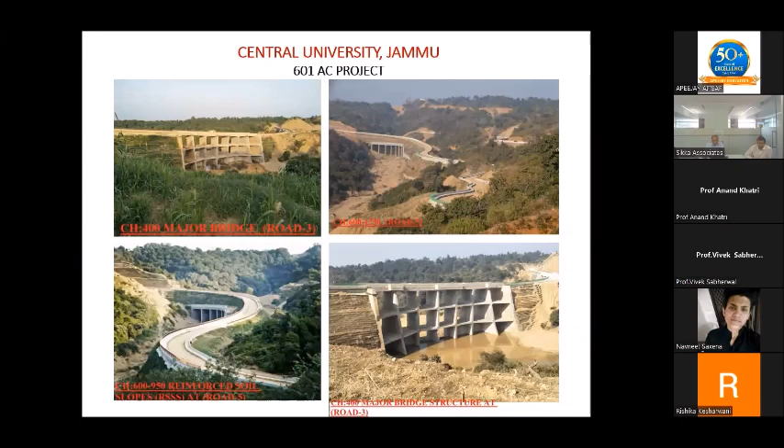Another project, IIT Ropar, about 500 acres, very flat land, quite unlike the earlier two sites we saw. In a flat area like this, it's much easier to do compact planning and a more efficient distribution of spaces.

In this 500-acre site, there's a main approach road. We've kept a good amount of distance between the very busy road and the rest of the institute campus, bringing it inside after a distance to give a great sense of arrival. From this point, we have a peripheral road which goes out to the entire edge.

There are 3 or 4 parts, like any large institute would have. One is the core academic area, right in the heart. To the left, the entire hostel zone, with sets of hostels for girls and boys, senior students, dining, etc., and some intermediate recreation spaces. To the right, the faculty residences, which in phase 1 are low-rise and mid-rise blocks—in phase 2 we'd go higher, and phase 3 possibly even higher. In between, close to both hostels and faculty residences, we have the sports block, sports fields, indoor games, etc. Four zones—any institutional campus would have these four.

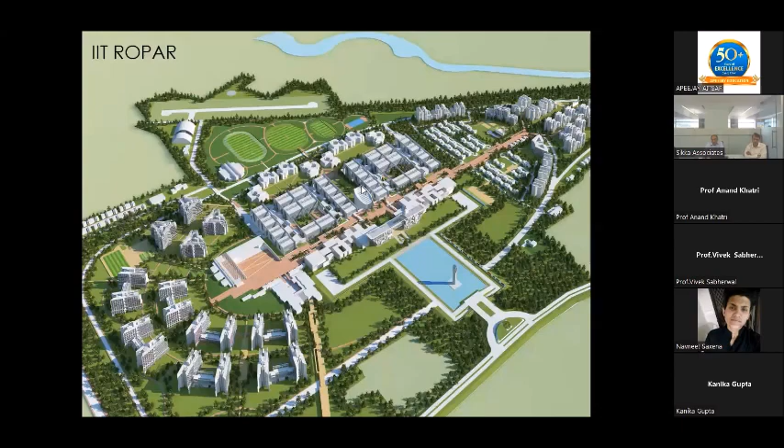Another project in Delhi, IIIT Delhi, where we did phase 2—a very, very compact campus, unlike what we've seen so far. This was a total of only 25 acres, very urban, but with a height limit of 11 or actually 10 floors. So we had very tight situations.

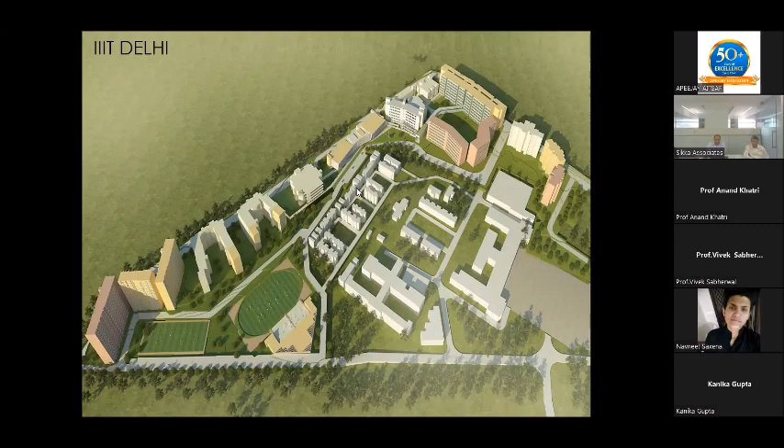For example, this white set of buildings is not our project—our project was only on the fringe, the yellow and beige buildings you see. At this neck, we had to make this building, and this was a very tight bottleneck on the site. But it has some of the largest student halls in the entire campus, so we had to pinch the building in the middle and allow it to expand on both other sides. This is the kind of building you see—one with a very interesting curve on the facade. On the stilt level, it has large stilted spaces, and above it has indoor seminar halls.

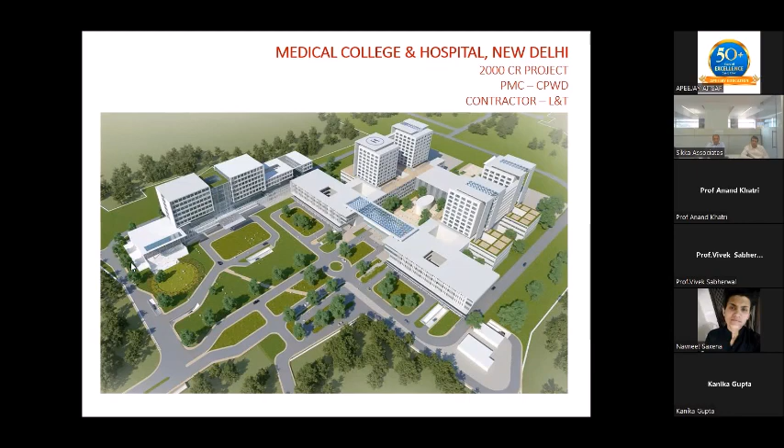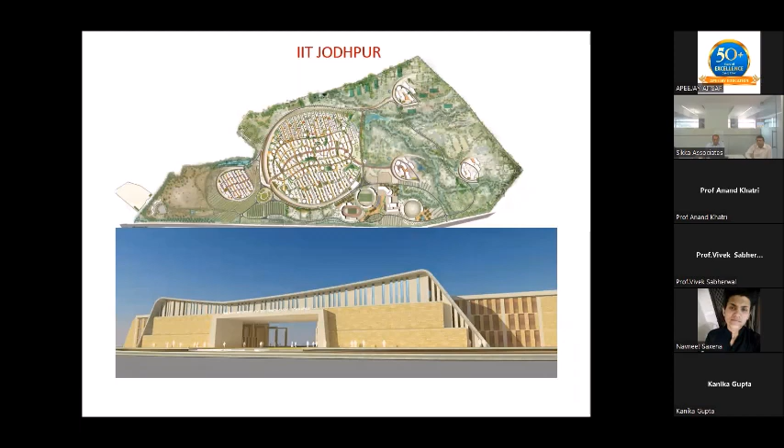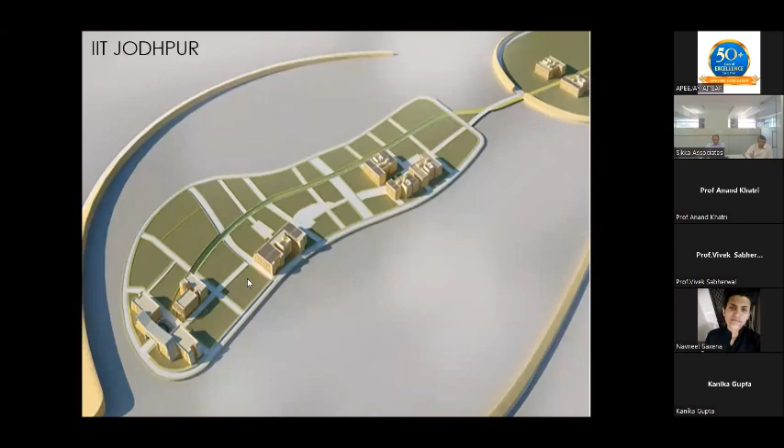This is a different project in Mohali, which I showed you earlier. And we also did IIT Jodhpur academic blocks. This is the entire campus. Master planning was not done by us, but phase 1 and phase 2 of the academic zone was done by us, which was a fewer set of buildings at the core. That's the kind of architecture you see, very different, but meaningful in terms of the robustness, in terms of the amount of limitation of the openings, limitation of the glass, yet allowing enough daylight into the interiors.

The south sides have a little jali facade, north sides do not have any such jali, they have more open glazing and a lot of sheltered walkways. So we're using the blocks as walkways themselves. The edge of the blocks cantilevers out or gives additional trellis, and as we evolve the blocks, they connect one to the next and become a longer walkway like this one you see here.

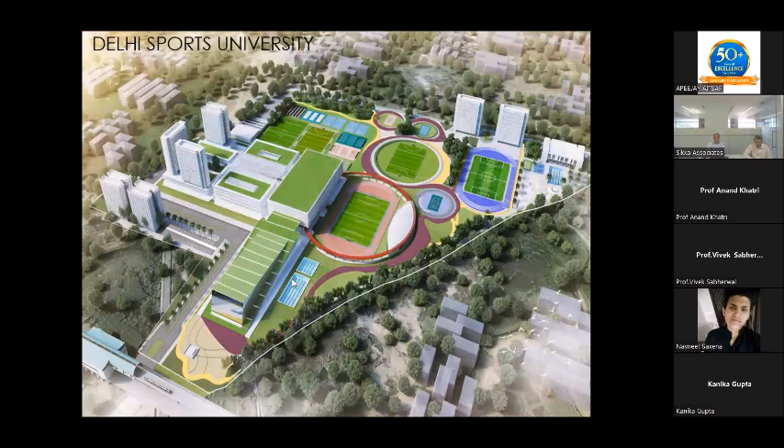One more project we're recently working on is the Delhi Sports University. That's about 80 acres in West Delhi, with a lot of sporting facilities and a very compact university area. Instead of spreading the university across the entire campus, because the whole purpose is to use the outdoors, use every square meter of land we can for the sporting work, which is actually the academic part of the university.

In this university, interestingly, the landscape is the classroom. So the buildings are really consolidated, taller, compact, only to the left, which is the sports university, or the right side, which is the sports school, and the rest of the entire facility, including the roof of some buildings and the entire range of sporting facilities required, was created so that all the land is purposefully and actively utilized.

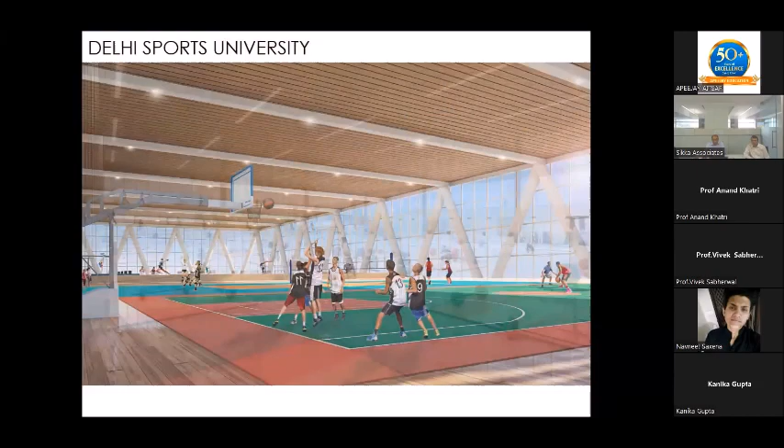A few views of that campus. Hopefully, we've been able to show you a range of ideas on each campus, a range of requirements on each geography and campus site that we have been trying to put together for our clients.